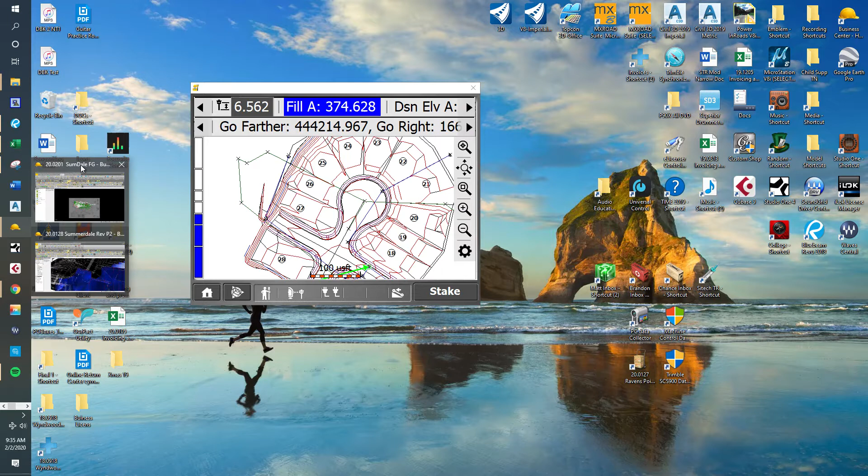From what I remember last time, they didn't give us any roadway profiles, and we just had to make do with what we had. And this one looks a lot better, but it may have more changes. I don't know what they did to the roads, but the alignment of the roads changed. So I'll just go through some of that stuff real quick.

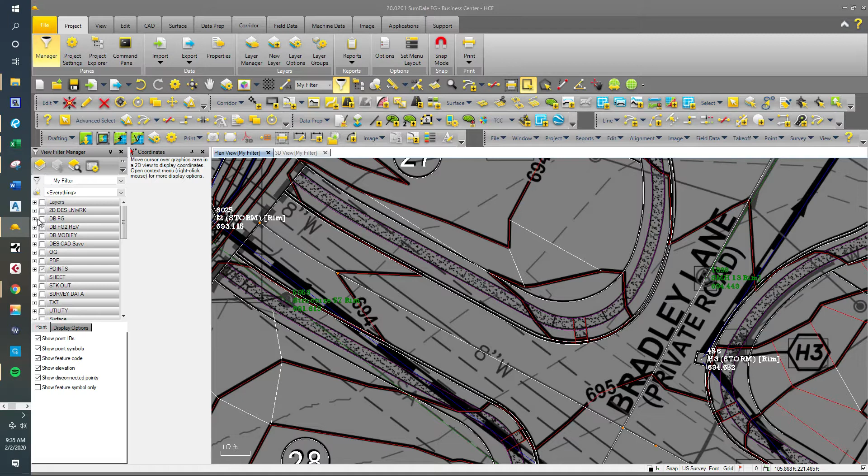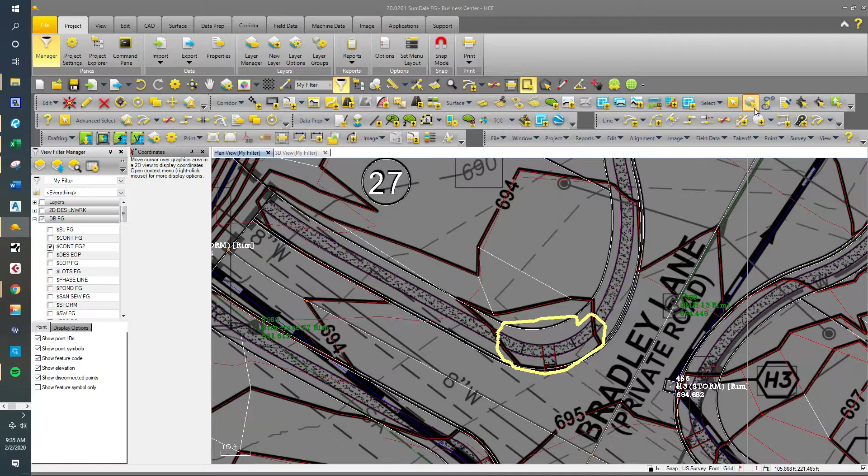Let's see, okay, so you can see this contour here, and this is just a few things I want to show you. Let's compare that to the other one so you guys can see what the changes were. So here's the old, here's the new. So you can see how that's changed. This is the new, that's the old. If I make the old a different color, you can see that there's a drastic difference.

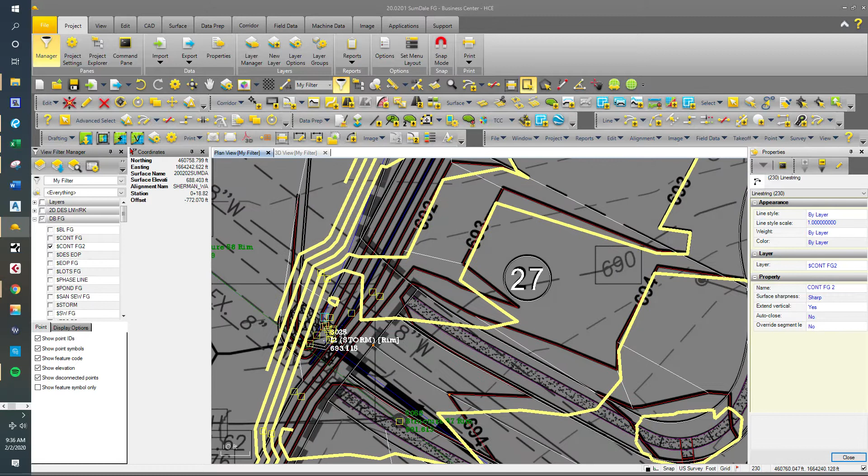The whole thing had to be redone. Nothing was similar enough, except for a couple of contours back here, and they changed all that too. They had it just dropping off, and now they've got this little head wall here, so quite a bit of changing in here. There's now a little V ditch on the side of this anymore.

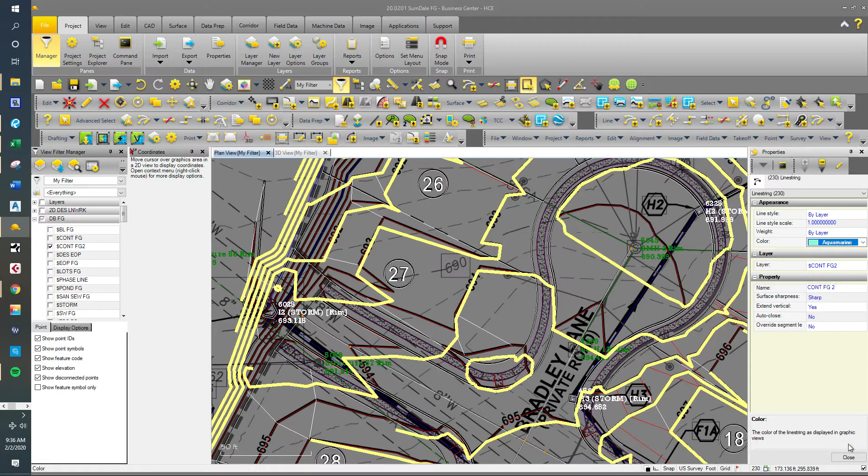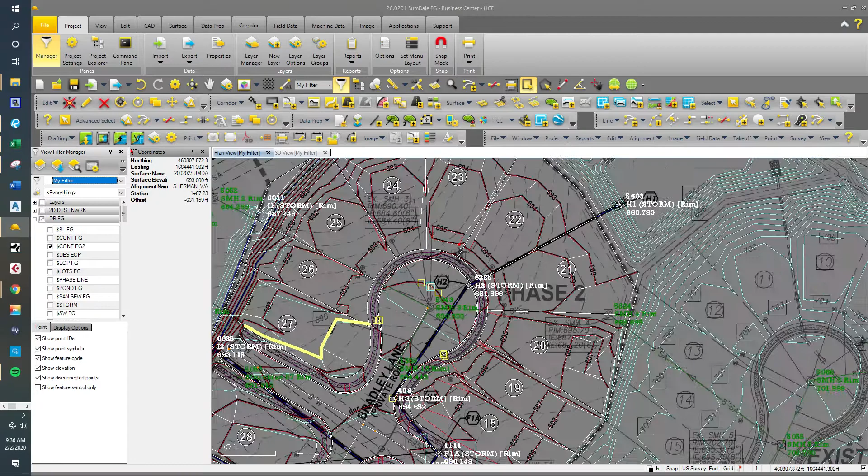This road moved over. I'm gonna go ahead and change the color of these. Let's just make them aqua. And so you can see the difference there, old, new. So that's why we went ahead and just rebuilt it. Rebuilt all the storm, everything per the new plan. I just treated it like a new build. It wasn't that big a deal.

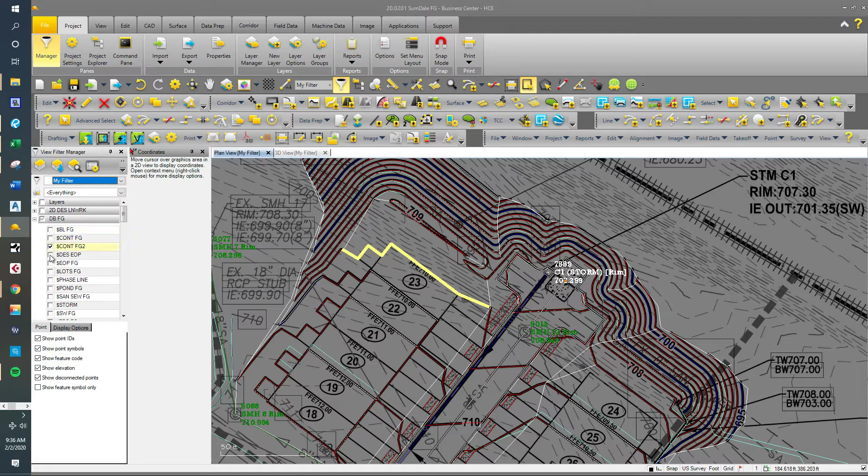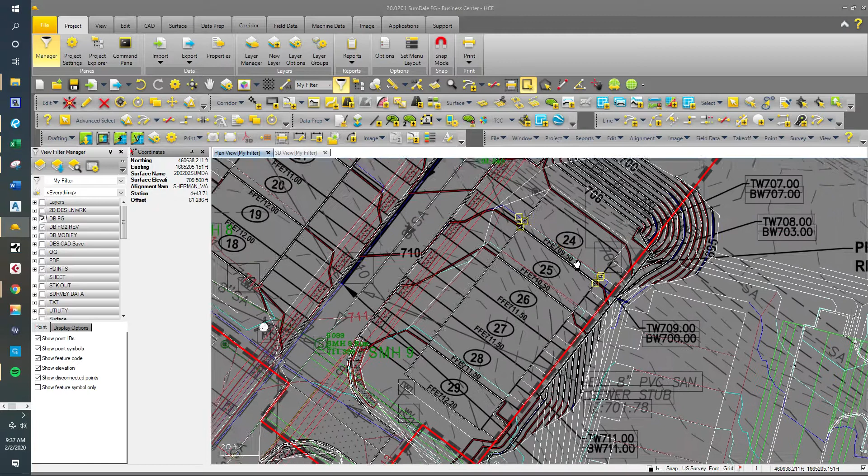These lots here changed. They all moved. If you look at the old ones, here's the old line, new line. It looks like they might have made this lot a little bit smaller, but then they also pulled all these back. These are all changed. Everything got pulled back to the southwest there. So that's some of the changes there.

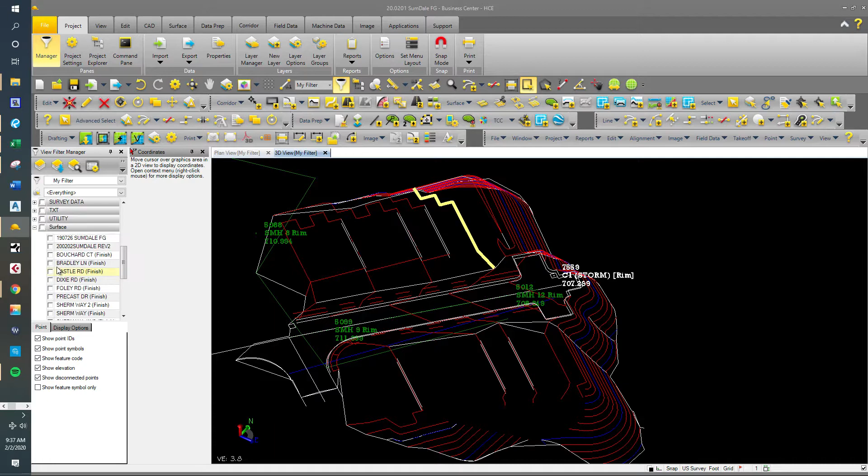And so again, it wasn't a huge deal, but we went ahead and did a clean one on this so we wouldn't have to worry about having any issues. So let's go ahead and get this turned on. It looks pretty good. We had a lot better information this time.

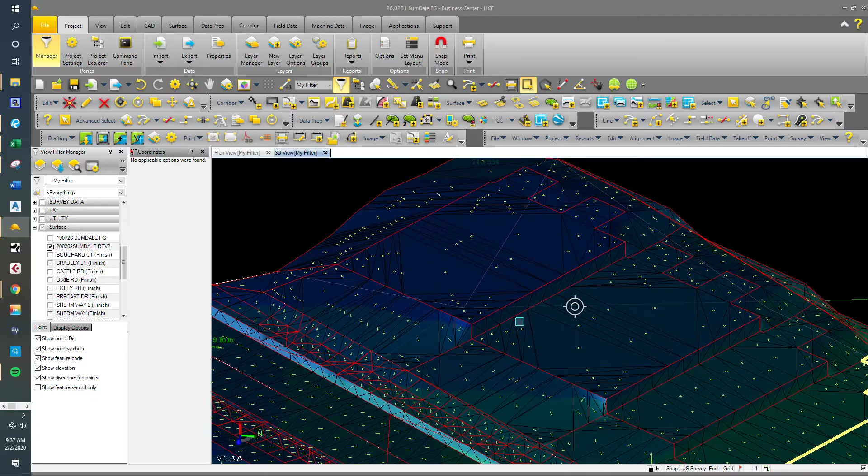I checked this, and there's a little sidewalk that goes up here to these, and these finished floors just have a drop off, as you can see right there. It just moves out, comes down off the edge here. It's much better, cleaner with this retaining wall idea going on here this time. Last time it was a lot tougher. This looks clean because they gave me this profile here this time. Last time they didn't.

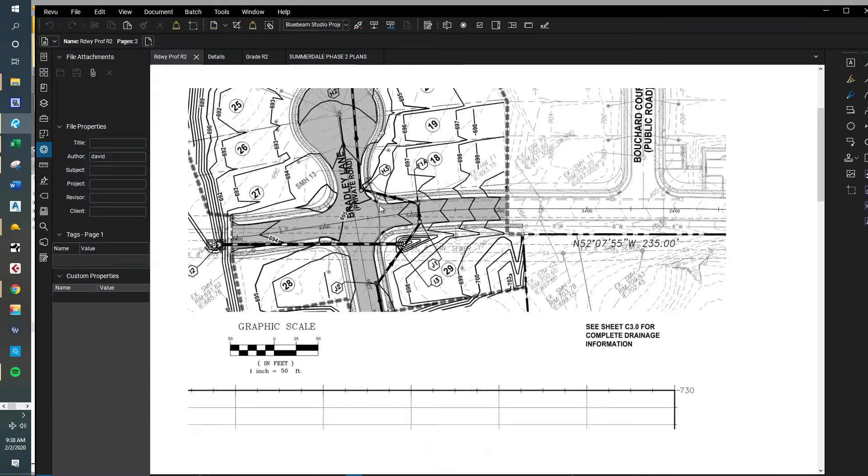So that being said, they gave us these plans, so we were able to build these, and you can see where this popped over the side here, and everything's twisted. And I don't know if they did anything here because it says existing. I'm assuming they're just holding from last time, but we're just looking at phase 2, so I wouldn't know if there's anything there that looks different yet.

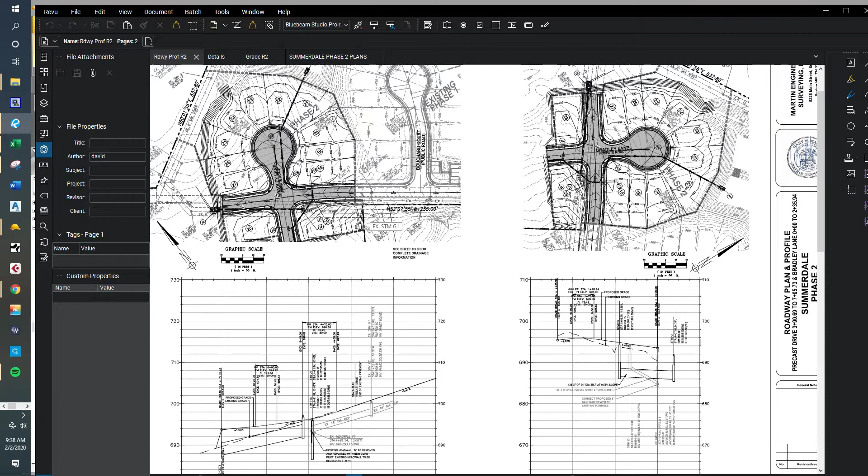So we have all this information. I think it all worked. I reported everything, and I think that's it. Let me go through the grade notes. I think I just went through the same exact thing I just told you. Horizontal changed, contours changed, we revised the file.

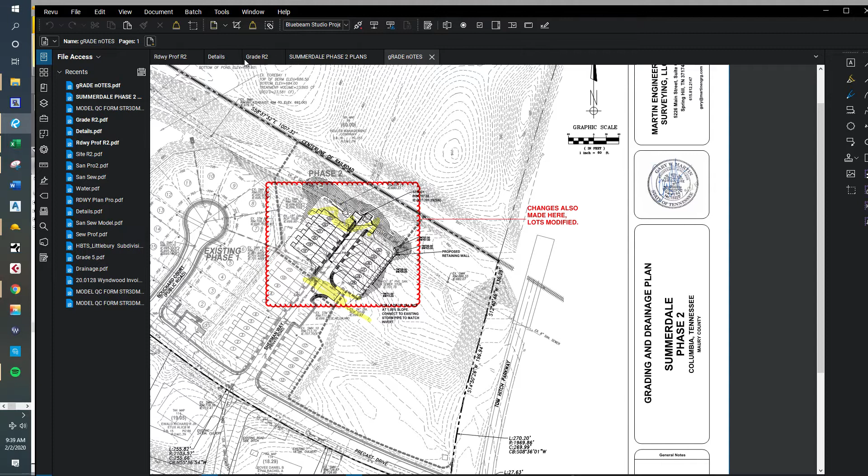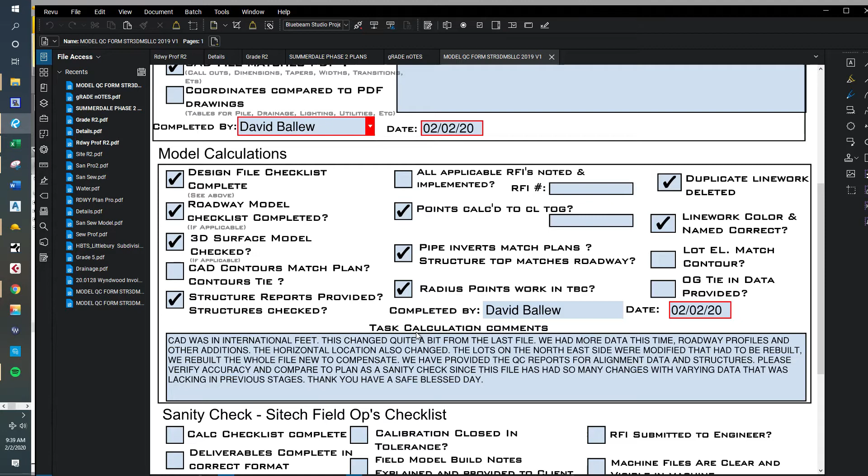Oh yeah, the CAD file was in international feet. You got to be real careful with that. When the surveyor goes out there, it's really easy to make a mistake: they just pull off the CAD, and the CAD's in international, which throws them a few feet out, and it could cause issues. Just a reminder that you got to switch over or modify it to U.S. survey foot. I think that pretty much covers everything. Roadway profiles, additions, horizontal. I just made notes on everything that we did.

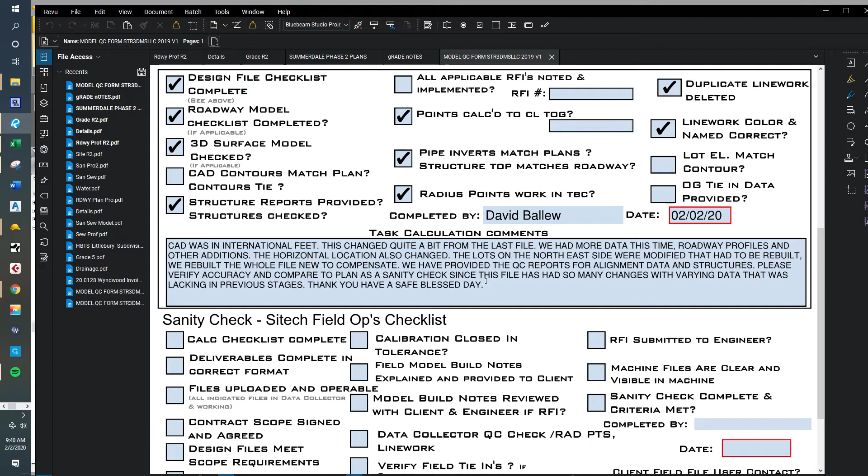Please verify. Do a sanity check. There's been a lot of changes on this, and the stuff we had before was not very good. We had to make do with what we had, and I think we had quite a few notes last time that we were lacking some information. So this one's going to look better. It's going to be more correct, but they're going to have quite a bit of work, having to change and probably cut some dirt, and I don't know what that's going to do for them, but it's going to be quite a bit of work from what it looks like.